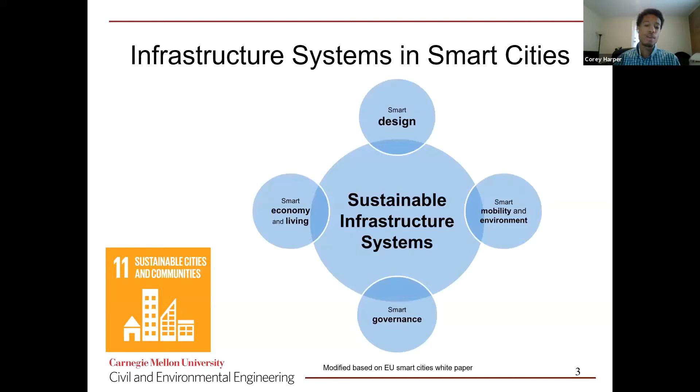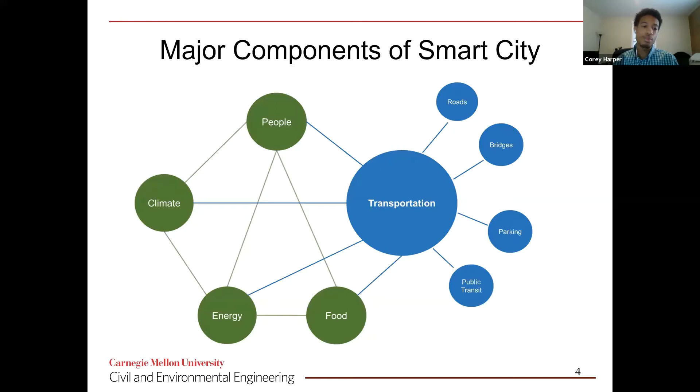For example, my research on automated freight looks at how platooning technologies could impact congestion on highways. And my research using rainfall data looks at how increasing frequency of heavy rainfall events could impact traffic flow. And what you see here on this list are people, climate, energy, food, in the green. People are at the top of this list because the goal of my research is to improve quality of life for people by looking at those emerging trends in transportation.

So the first thing I'm going to do today is I'll go over an introduction about how robocars could change the way we envision our cities and communities. Then after that, I'll go over a study that we published on private robocars, where we developed an agent-based parking model. After that, I'll discuss some of the resilience work that I did during my postdoc. And finally, I'll talk about some of the other emerging areas in transportation that my students are currently exploring.

This is good. This means that even though people might be traveling more, we're seeing a lot less crashes on the roadway, a lot less deaths on the roadway. But around 2015, 2016, we started to see a spike in the number of traffic deaths and traffic rates. This is concerning because in 2015, there were about 32,000 crashes compared to about 35,000 crashes in 2016, which represents the biggest spike in traffic deaths in a one-year span in the past 50 years. In addition, pedestrian fatalities have also increased by 41% since 2008, which impacts the livability of many cities.

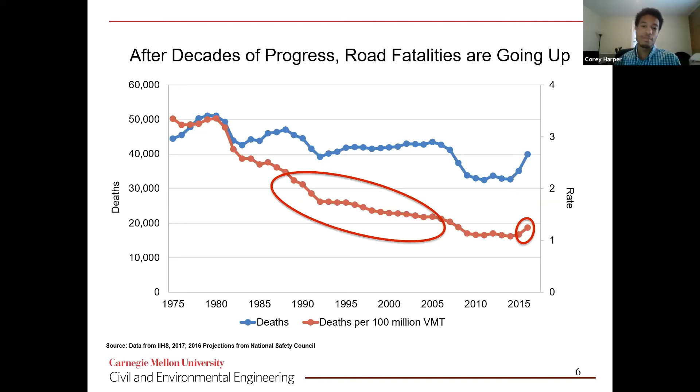So just to put this in some perspective, this is about 670 fatalities per week, which is greater than the capacity of a jumbo jet at its highest capacity configuration, which holds about 660 passengers. In other words, even if there was a plane crash each week, this still wouldn't equal the total number of deaths that we experience on the roadways each year.

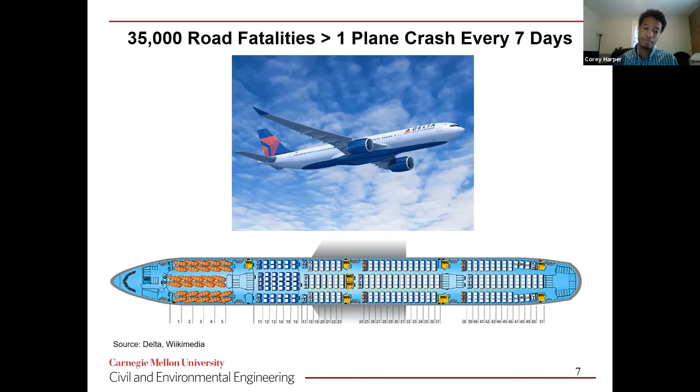So what do we do? Like I said, we're looking at those emerging trends in transportation. Connected and automated vehicles have the potential to address some of these issues and could very well be on our streets and highways within the upcoming decades. Automakers are already marketing cars with some automated features, such as lane keeping assist and adaptive cruise control. Some of you might have heard of these. A lot of cars today have automatic emergency braking. These are all automated features, and these companies are progressively working towards making more highly automated and self-driving cars.

Car company Tesla is equipping every new Model S sedan and Model X SUV with the necessary technologies for full self-driving capabilities in exchange for about $7,000. Ride-sharing company Uber has deployed a fleet of self-driving taxis in Pittsburgh and in other cities around the country, and have even offered some customers the option of riding in these vehicles. And last but not least, the United States Department of Transportation has released their third policy document, providing guidance to automakers and other entities on the safe design, development, and deployment of some of these automated driving systems.

So there's a lot going on. There's a lot of investments being made by private companies, and there's a lot of investments being made by the federal government as well. They're on board. So that's what I'm trying to get across to you all.

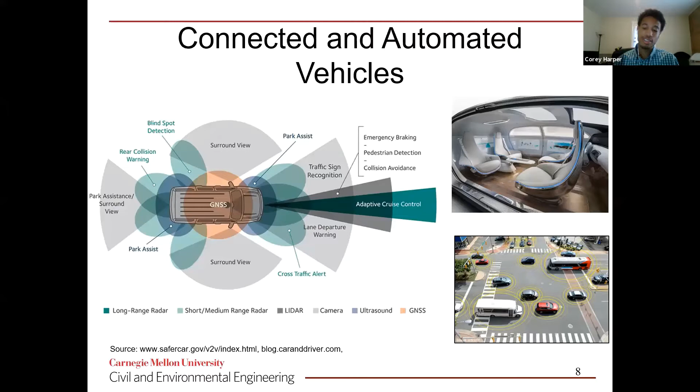So autonomous vehicles, they do three things: they sense, they plan, and they act. They sense the world around them by classifying stop signs, other vehicles, and pedestrians. They plan the next maneuver - for example, a stop sign is coming, what should I do? And the act, the physical connection of applying the brakes. All of these are similar to what a human would do when driving. But the hope is that autonomous vehicles can do this better and much faster than we can without getting distracted.

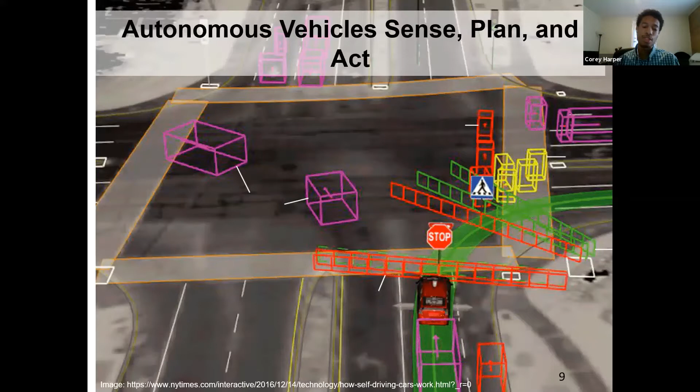So it's not until levels 4 and 5 that you'll begin to see people sleeping in the back seat, watching a movie in the back seat, not really focused on the task of driving, because the vehicle is doing all of those things, right? So those are your fully self-driving vehicles.

And then you have your level 3 vehicles. This is kind of a gray area, because the vehicle is responsible for driving and monitoring, but the human is supposed to be capable of intervening in case of an emergency. So what's happening here is that the robocar is the main driver and the human is the backup driver, and we're not really good at being a backup driver. We need to be engaged, otherwise we get bored. So this is kind of a gray area.

But what we're really good at is levels 1 and 2, where the robocar is the backup driver and we're the main driver. We've done a lot of work in this area in the past, looking at how some of these early level warning and partial automation systems could impact roadway safety. I'm not really going to touch on some of those projects today.

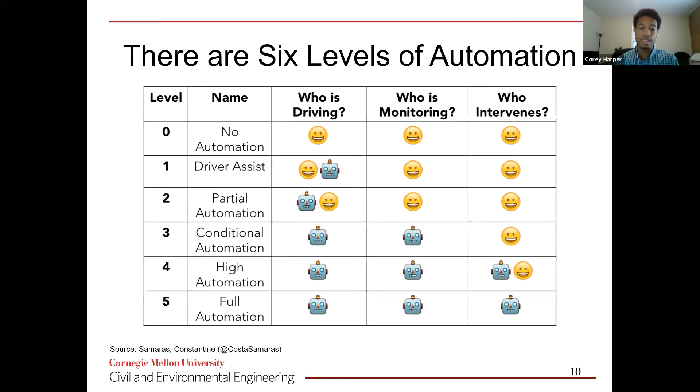So these are some scenarios that we're really interested in exploring, and I'm sure COVID is going to have an impact on some of these. Maybe people might just work from home now instead of traveling 2 or 3 hours to work in their car. These are things that can impact the transportation network, and these are some questions that have a lot of uncertainty that we're really interested in as transportation engineers.

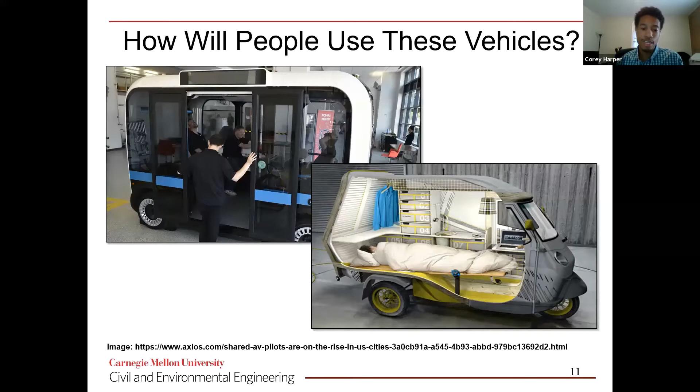Another thing that is of interest to us is, will people own or share these vehicles? There's a Tesla model where everyone owns their own automated vehicle, or will there be some sort of shared AV pod that transports people around the city? There are a lot of transportation professionals that feel like, oh, of course these vehicles are going to be shared. But I think it's important to explore scenarios that don't lead to these outcomes, and if these aren't the outcomes that we want to encourage, then we have to be active in understanding this.

So what happens if you park there is an enforcement officer is going to come by, they're going to check everyone's sticker. If you don't have a sticker, they're going to check your license plate, write that number down, and come back 2 hours later, and if you're still parked there, they'll give you a ticket. So right now we're pricing the public realm in many urban areas by requiring residents to pay for a parking permit. So like I said, this street is in Shadyside. If this street didn't have one of these residential parking signs, one could, in theory—now I'm not encouraging anybody to do this—park there and walk 15 minutes to campus if you wanted to avoid parking charges.

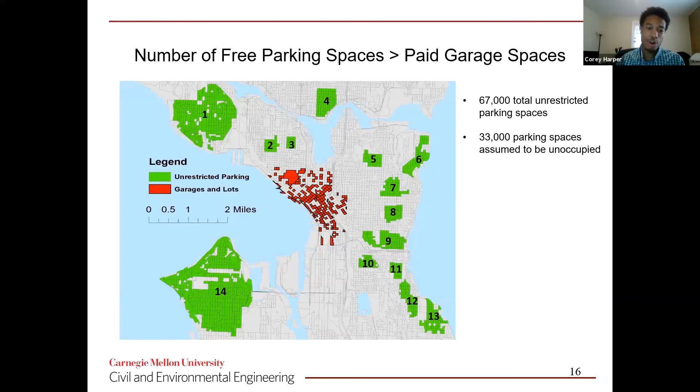In this model, each AV is an agent searching for cheaper parking. So here are your two options: you can either park downtown, or go to one of these unrestricted parking zones.

The objective of each AV is to minimize the total cost to the user. This total cost is the summation of your round trip cost of driving and your daily parking.

Your cost of driving takes into account fuel, tires, depreciation, and also the distance you drove from point A to point B.

You also have your daily parking costs. In the downtown urban area with all the parking lots and garages, there's a fee to park. But outside downtown, in one of those free unrestricted parking zones, there's no fee — but you're going to have to travel far to get to one of these spots.

So what we're trying to see, from an economic standpoint, is what's more feasible: to travel 12 to 14 miles back and forth to avoid parking charges, or to go to the closest parking lot downtown that's inexpensive and park there instead. That was the objective of the AVs in our model.

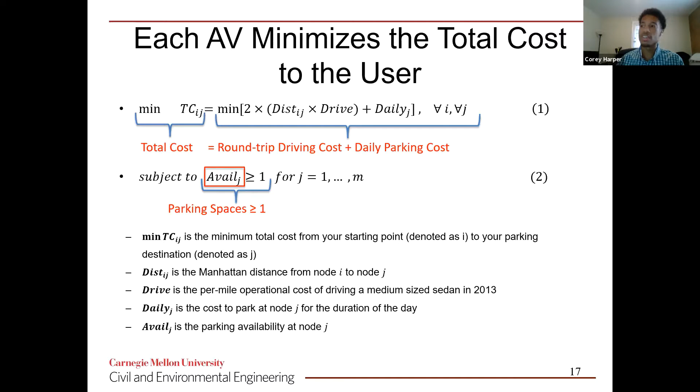For each parking spot selected by the AVs, there are energy implications. The increase in energy use is the product of the emissions factor — the greenhouse gases emitted from each vehicle traveling to one of their parking spots — and then the fuel economy.

This is the average fuel economy of the passenger fleet in Seattle, along with the additional empty vehicle miles traveled generated by traveling for cheaper parking. This is how we estimated our energy use and some of the implications from these vehicles going to these more distant, cheaper parking locations.

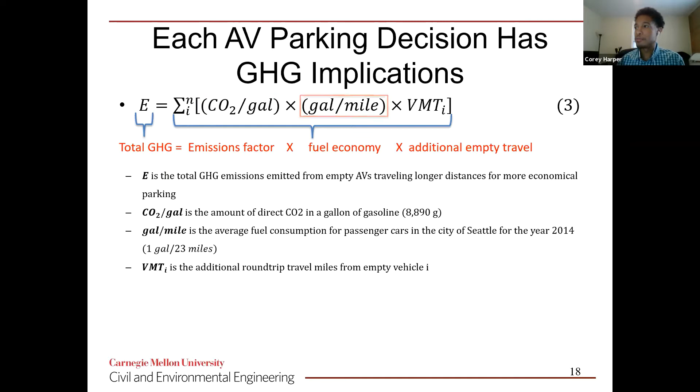So what we did first was we put a single AV in downtown Seattle and have it rank its parking choices, just to see how the AV chooses parking. Later I'll show you what happens once we increase this penetration rate. We did this to demonstrate parking decisions by AVs and visually show this.

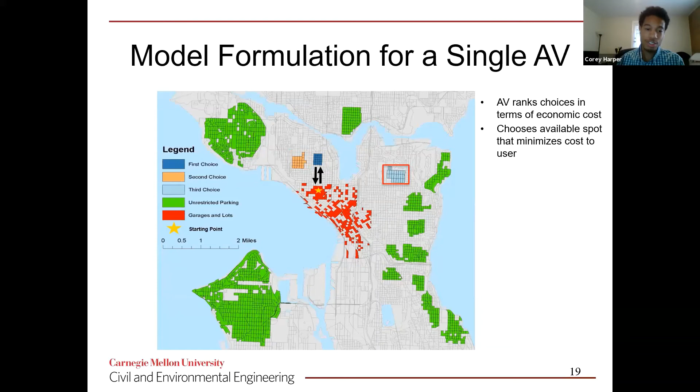The AV ranks all of its parking choices in terms of economic cost. Due to the low cost of driving, the AV chooses the free parking spot closest to its starting point, cycling through all these options. If no parking is available there, it goes to the second lowest cost spot, then the third, and so on until an available parking spot is found.

So what happens when we start to increase the market penetration rate of AVs downtown? We saw what happens with one AV — nobody's competing for parking yet, so it can pretty much get all of the zones closer to it. Its first, second, and third parking spots are the free parking zones closest. But what happens when these spots fill up and AVs have to travel farther distances? What decisions does it make?

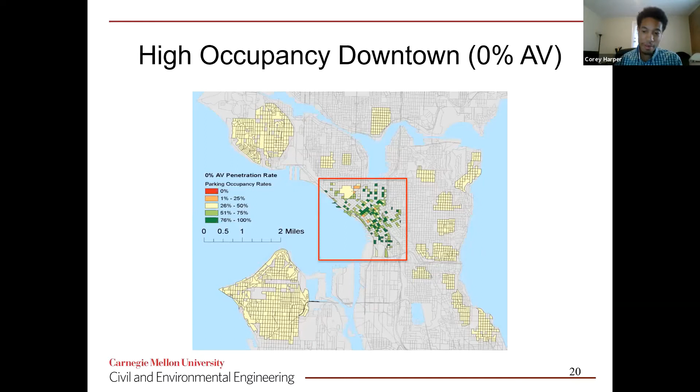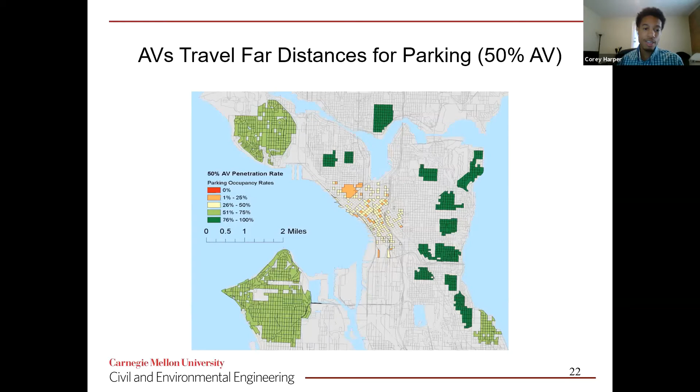Now, we didn't model these parking lots and garages as agents, but most likely what would happen is if people are leaving downtown in search of cheap parking, the lots and garages downtown would adjust their prices to compete with this cheaper parking. But what you're seeing right now is the lots downtown have really low occupancy rates, and AVs have filled up the unrestricted parking zones close to downtown and are starting to travel farther distances for cheaper parking.

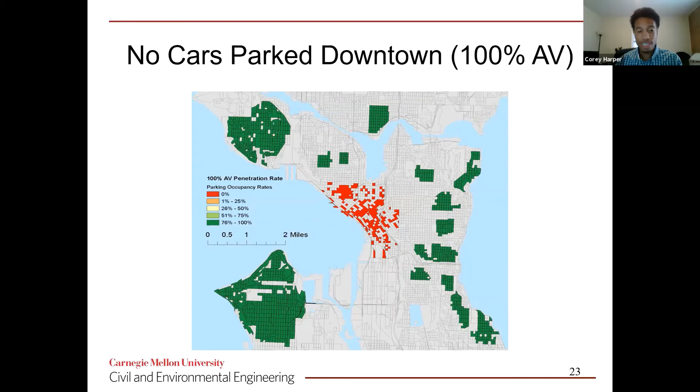Now, on the previous slide I showed you that all of the AVs are going to leave the downtown area because it's cheaper to park in one of these unrestricted parking zones. A big part of this is because the operational cost of driving is really low. This operational cost takes into account fuel, depreciation, tires, and maintenance, but doesn't take into account insurance and things like that, because whether you drove to these parking spots or not, you'd have to pay some of those costs anyway. But this parking cost is low.

The lowest cost to park in the downtown area is about $7.

So the round trip break-even distance is about 28 miles. Up until that point, if your free parking spot is within 28 miles, the AV is going to choose to park in one of these unrestricted parking zones.

I'll touch on some policies that can deal with this later, because if we're all coming outside of our homes and there's an AV parked there, we're going to start to get mad. Some of those signs you saw earlier, like 2 hours of parking, might end up popping up in some areas if AVs are taking everyone's parking spot.

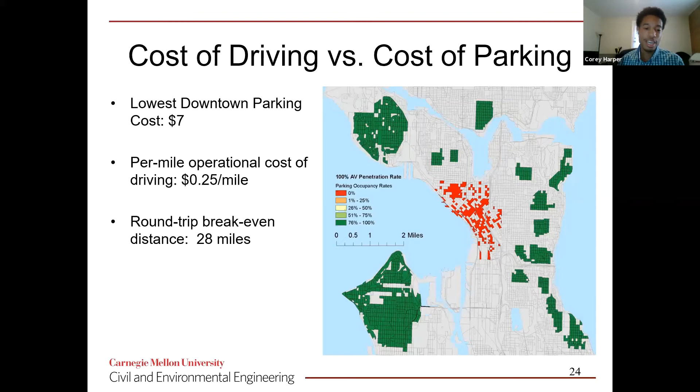So one of the things we wanted to see was whether VMT, energy use, and all these things would increase by a substantial amount if everyone's leaving the downtown urban core. The data set we looked at is a sample of the vehicles parked in downtown Seattle - it just looks at the parking lots and garages that have daily fees.

So we didn't see big increases in some of these numbers, and that's just because there's so much more cars traveling in and out of Seattle than there are cars parked downtown. You'll see some increases, and you might see big impacts on certain corridors, but overall we don't see substantial increases from AVs leaving the downtown urban core and going to more distant parking locations.

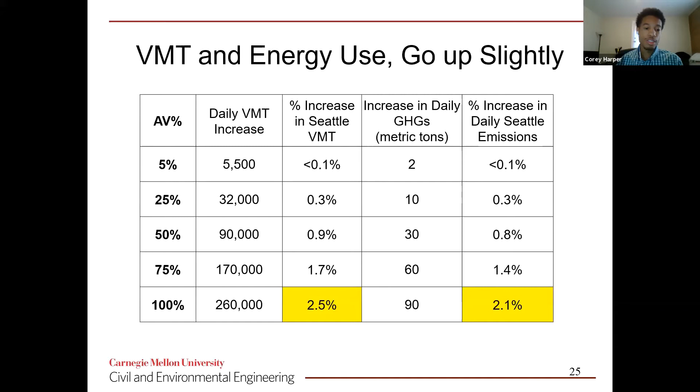So parking is a big business in Seattle - they generate about $170 million in annual revenue from people parking downtown. So a lot of money could be lost if cars move away from the downtown area.

But this does mean that land will be freed up for other uses - bike lanes, parks, houses, libraries, and shops, you could all see these things in the future.

Each AV is traveling about 8 miles per day - this is about a 2.5% increase in VMT and energy use, but there's going to be specific corridors that bear the most impacts. A 2.5% increase in vehicle miles traveled could be a big increase in congestion on some corridors, especially if a lot of cars are already traveling there during peak hours.

As a policymaker, some things you might think of doing are creating a tax for people that want to leave the downtown area in search of cheaper parking - you incentivize them to stay downtown instead of traveling and avoiding some of these parking costs.

And what if AVs were shared? What if there were EVs? What if they could boost transit? These are all questions we'd like to explore in the future, and I'll touch on some of that later in our future study.

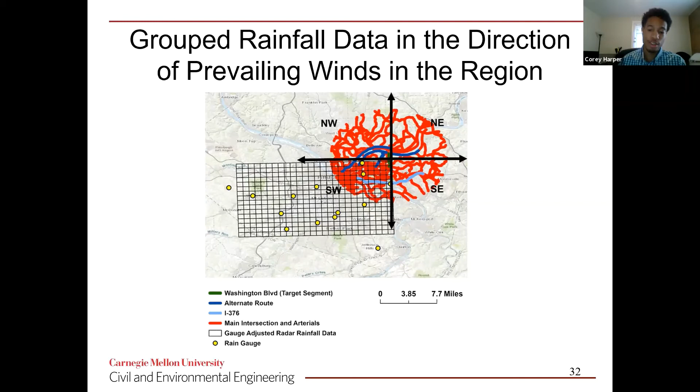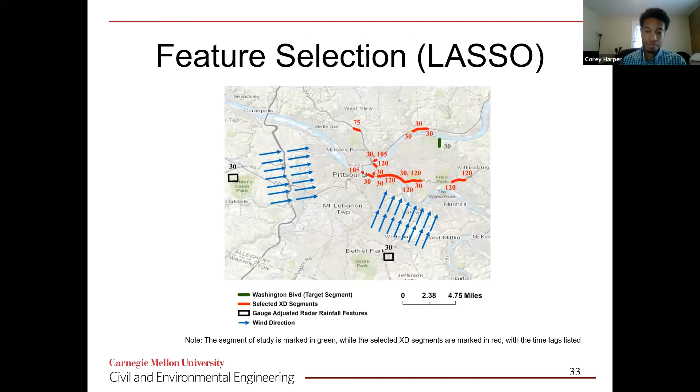One important aspect of our paper, like I was mentioning before, is that we wanted to compare the performance of our model using high resolution rainfall features with the classical method of using a single citywide rain gauge. Our results show that using higher resolution features does improve overall performance, but the magnitude of these improvements, in those weather conditions where the model performance improves, is likely to vary by the roadway segment. Here for Washington Boulevard, we see the most substantial improvements in model performance during moderate and heavy rainfall events.

So what we're seeing is that using the classical method of a single rain gauge, we get about 18.9%, whereas if we use high resolution rainfall features, we get around 18%. That's about a 4% improvement in model performance overall.

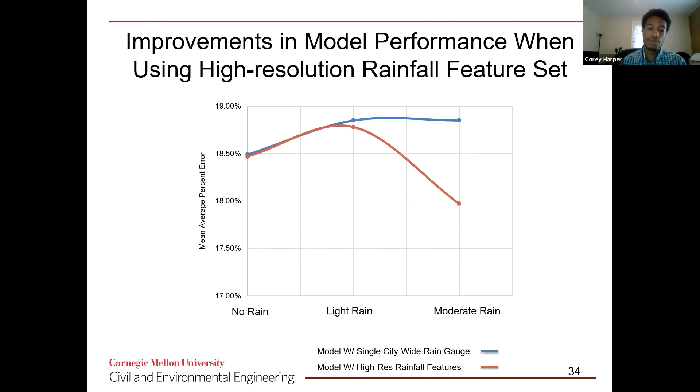Now, I know some of you might be saying, well Corey, that model performance, you did all that work to get from 18.9 to 18%. It's only raining, it's not raining every day.

These heavy rainfall events are rare, but the thing about traffic safety is that even small improvements provide huge benefits. For example, in 2018, there were 900,000 crashes that occurred in inclement weather. If we could eliminate even a small percentage, let's say 0.1%, you could see benefits of over $160 million annually.

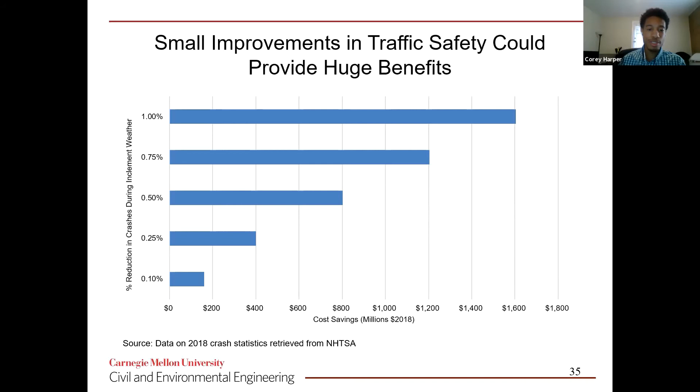And if you get to even a 1% improvement in road conditions during inclement weather events, you could start to see 1.6, and even if you got to the 4%, you could see some really big benefits. So you don't need huge improvements in traffic safety to provide huge benefits.

So here are some of our conclusions. We see that many of the rainfall segments are far away from our target segment, and that means these segments are providing the model with information. Although imperfect, these segments are providing the model with useful information to predict travel speed on Washington Boulevard 30 minutes ahead.

The incorporation of high resolution rainfall features also offers overall improvements in model performance when compared to only using a single citywide rain gauge. But the magnitude of these improvements, in those weather conditions where model performance improves, is going to vary by roadway segment.

And high resolution features could have much higher correlations with future rainfall on Washington Boulevard, leading to substantially better predictions during certain rainfall events.

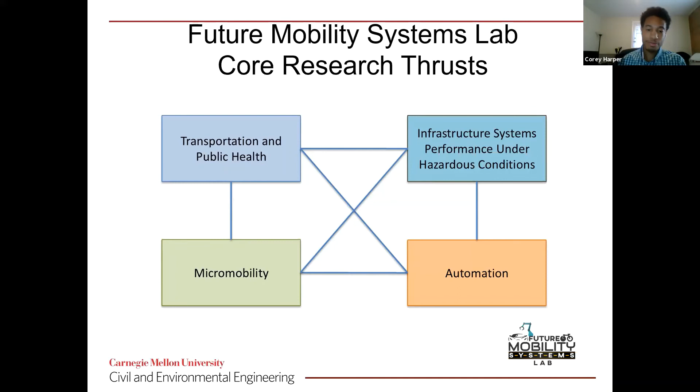One thing I like to do is reimagine the way people travel in today's urban areas. Currently, most short vehicle trips, 0 to 3 miles, are still done by car. The thing is, these could be replaced by micromobility options - your bikes, your scooters, your shared bikes. So for example, in Pittsburgh, about 50% of short vehicle trips are done by cars.

A lot of times these are done as single occupancy travel, meaning a person travels in the car by themselves - they go to the gym, they go to the convenience store, and then they come back home. These have impacts on congestion, and a big motivation for this project is the fact that the transportation sector is the biggest emitter of greenhouse gas emissions in the United States. These short vehicle trips contribute a lot to that.

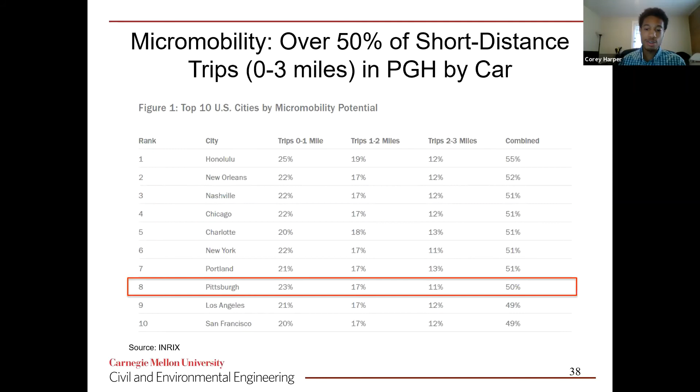I'm going to explain this one project, then wrap it up, because my 40 minutes is ending pretty soon. I've received some seed funding from Traffic 21, and one thing we're looking at is - in the past slide you saw 50% of short car trips can be replaced. So what we're trying to do is develop an upper bound. This doesn't take into account limitations on replacing some of these short trips.

So you could have weather - nobody wants to ride their bike when it's raining or snowing out. You also have physical limitations of some riders - some people have disabilities, or they're elderly, and these people are not likely to replace their short car trip with micromobility. So the first thing we want to do is figure out what's the upper bound.

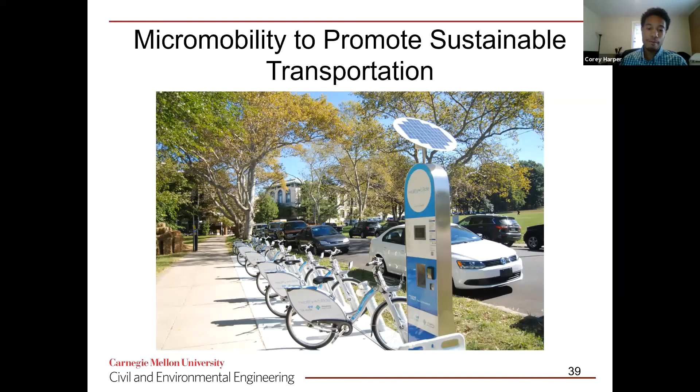Once we figure out what the upper bound is, we want to see what happens when we start to replace short car trips with micromobility options, and what impact that has on traffic congestion and energy use in the transportation sector. So I'm going to wrap it up now.

If there's nothing else you leave with today, it's that I envision a future transportation system that's strong and robust to extreme weather events, promotes public safety, and promotes sustainability. And I think that the research I have on hazardous modeling, micromobility, and automation can help us get there. I hope everyone enjoyed this presentation.

Are there any questions? I have lots of questions for you, Corey. Okay, the first is, has the trend of rising fatality rates continued since 2016?

Since 2016, I think at some point the overall fatality rates started to go down, but what we started to see recently was an increase in the number of pedestrian fatalities in many urban areas. So they are going down overall, but there's still some concern because we want to create sustainable smart cities, right? And if you're walking or biking, you're at risk of getting into a crash, then it's not a good thing. So that's a big concern right now for a lot of transportation engineers.

Okay, what implications does the agent-based model have for public transportation? So let's see, this study really looked at privately owned vehicles, right? Now, I don't know if it'll have too much impact on public transportation.